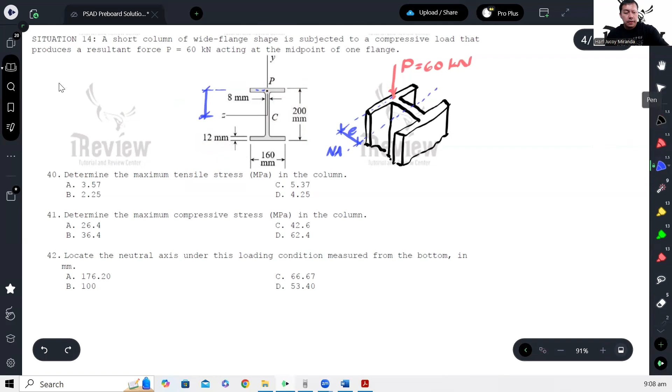The eccentricity E is 200 over 2 minus the thickness of the flange, 12 over 2. That gives us 94. So 94 mm is the eccentricity.

Alright, so this is combined axial and bending. Determine the maximum tensile stress in the column.

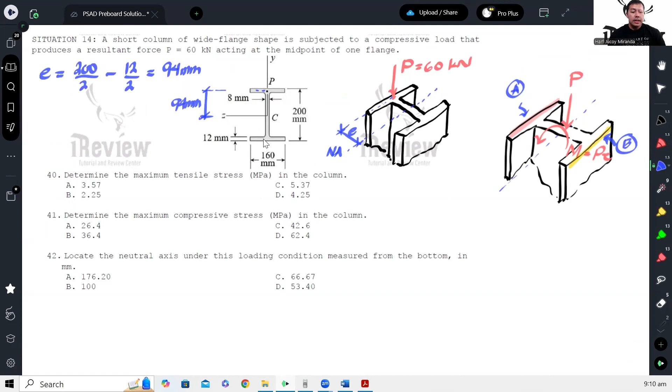Now, for combined stresses in mechanics, our sign convention is positive for tension and negative for compression. But in soil mechanics or geotechnical engineering,

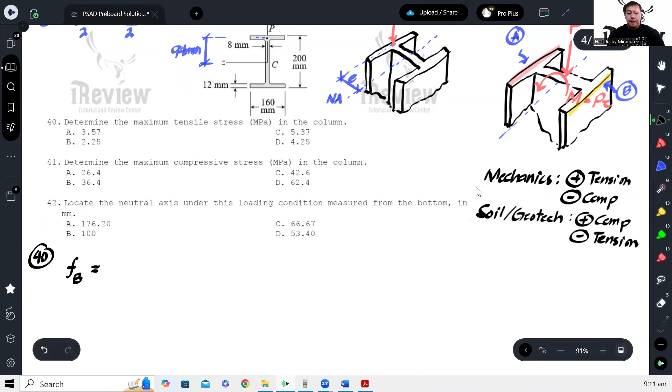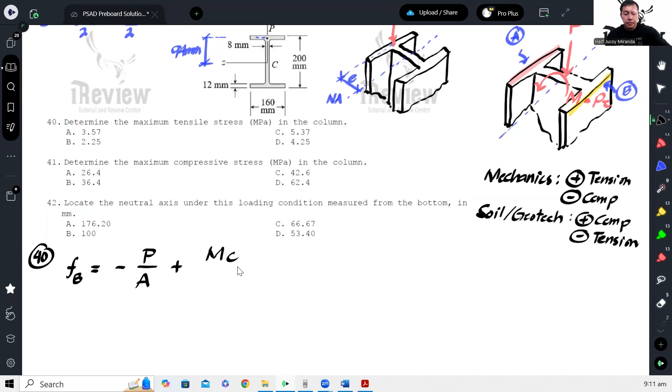it's the opposite: positive is compression, negative is tension, since soil cannot carry tension. So the compressive force will be negative P over the area of the wide flange, and the effect of the moment is positive since it's tension, giving MC over I.

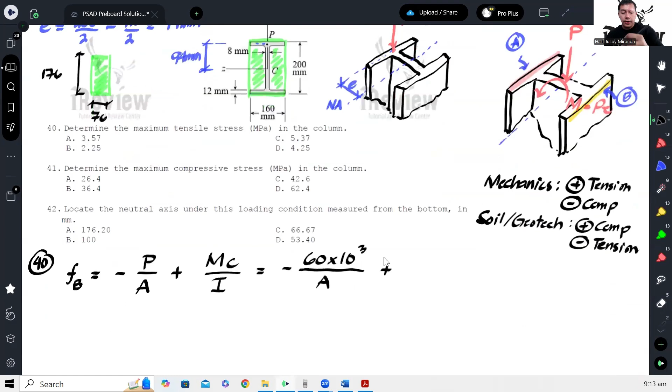That's 0.094 meters, then we multiply by 1 million to convert to Newton-millimeters. Then C is this distance.

Ayun yung C. Kung gaano siya kalayo from the neutral axis, which is half lang ng depth, no? So 100 over I. Sige ko lang muna dito I. Okay? And I think that's it.

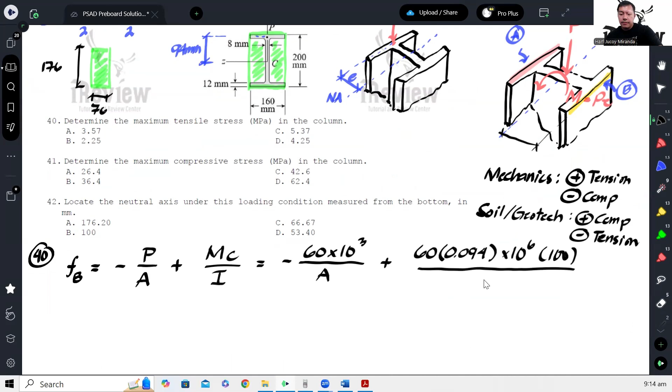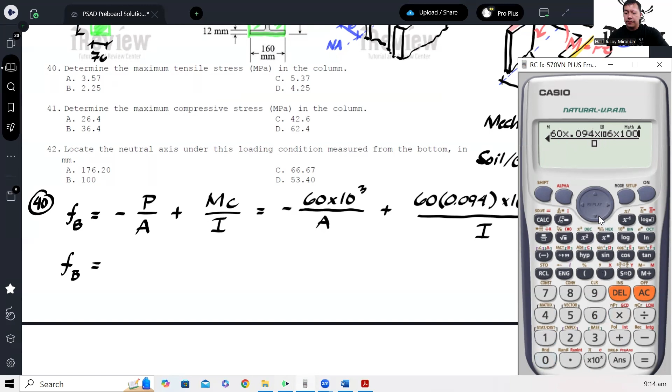We can now calculate the stress at B. Kapag nag-positive ito, ibig sabihin under tension siya. Pero pag nag-negative, ibig sabihin under compression pa din. Okay, so 60,000 over area, lagay ko lang sa A, plus 60 times 0.094 times 10 to the 6 times 100 over I. Lagay ko lang yan sa B, no?

Yung A natin, area, sabi ko nga, 200 by 160, tapos ibawas natin yung dalawang green. So, ang base ng green ay 76, ang height ay 176. Tapos yung I naman is moment of inertia ng buo, which is 160 times 200 cube over 12, minus dalawang moment of inertia nitong green. So, times 76 times 176 cube over 12.

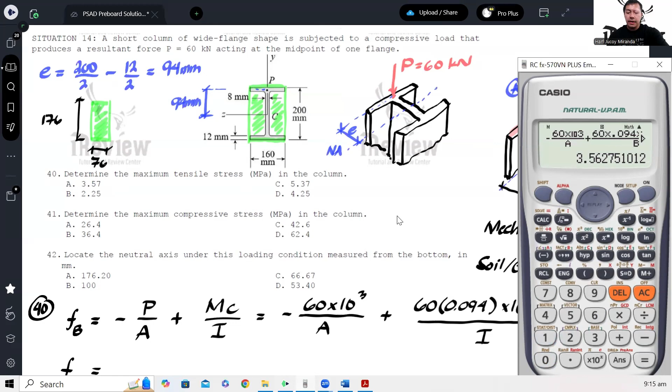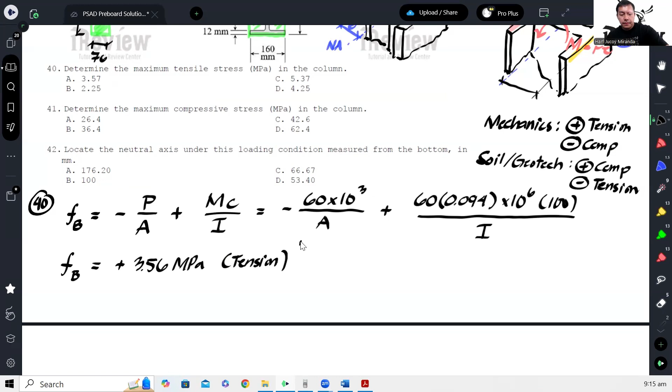Ayan. Okay, and that should give us our stress. At kung mapapansin nyo, nag-positive, no? So meaning this is under tension. Okay, and that will be our answer for number 40.

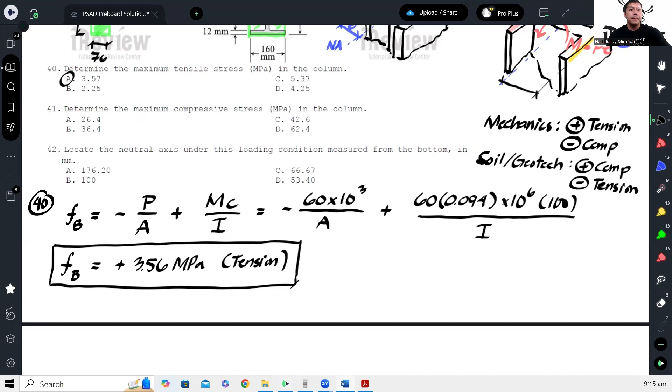Okay? Next, what is the maximum compressive stress? So dito naman, nahanapin natin yun. Dito sa fiber A, no? Kasi nandyan, puro compression. Compression din yung moment dyan. So therefore, number 41, bali, stress sa A will be equal to negative P over A. Tapos ito, negative din.

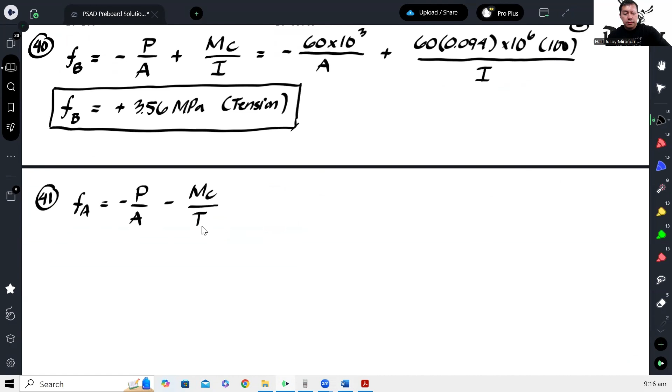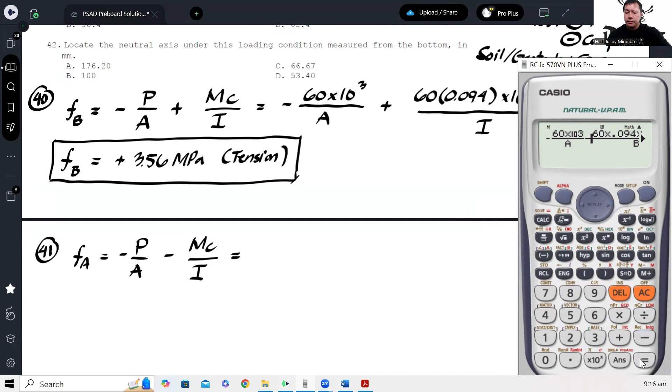So bali, ito lang ulit yun. Gagawin lang natin tong negative, no? So ima-minus lang natin to. Ayan. So, negative 26.43 telling us that this is, in fact, compression. Okay, so that's why it's letter A.

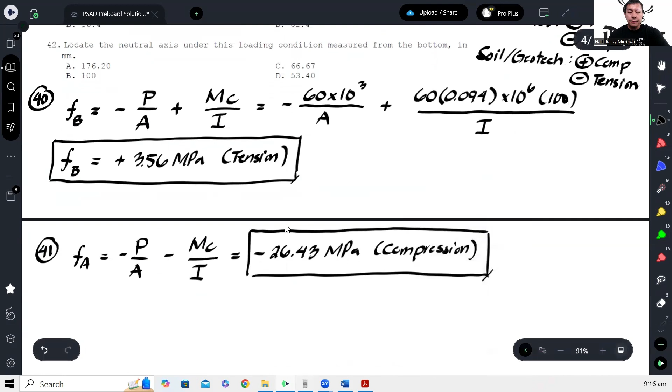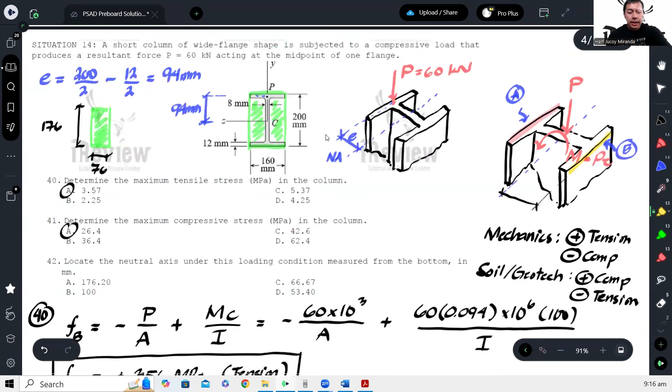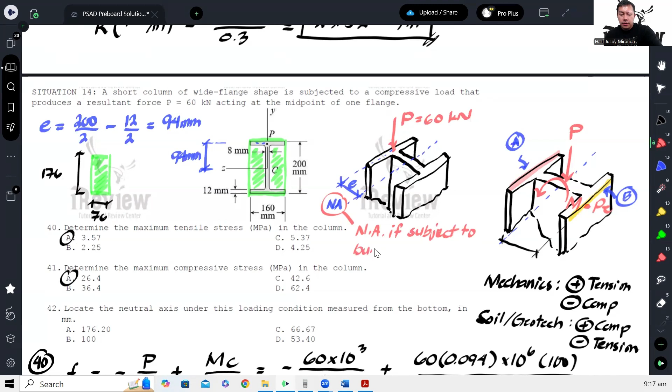Okay, next, number 42. Locate the neutral axis under this loading condition measured from the bottom in millimeters. So, ano ba yung neutral axis? You might be thinking, di ba neutral axis, sabi kanina ni Sir, ito na yun eh. Okay? So, guys, ito yung neutral axis. Neutral axis, if subject to pure bending.

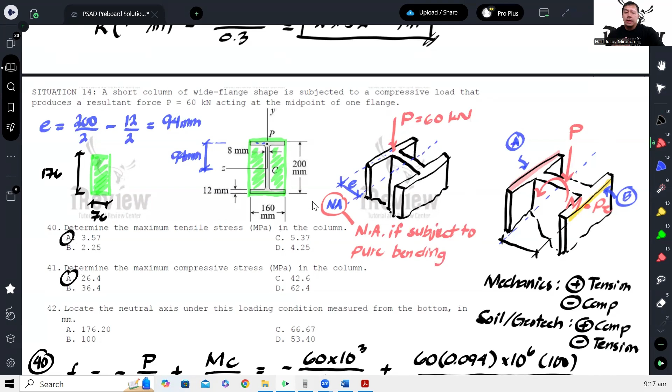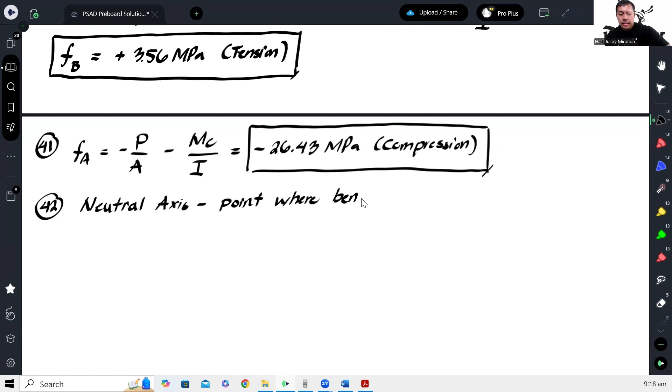Okay? Kaya lang, hindi kasi siya pure bending eh. Combined axial and bending siya. So, kapag sinabi kasi natin na neutral axis, i-define lang muna natin dito sa number 42. Okay? Pag sinabi natin na neutral axis, hindi lang yan basta centroid, no? Ng cross-section. In fact, ang neutral axis, kaya siya tinawag na neutral, ibig sabihin, zero yung stress doon. Okay? Pag sinabing neutral axis, ito yung zero ang bending stress doon sa point na yun, no? Point where bending stress is zero, no? So, ibig sabihin dito, ang mangyayari kasi, kapag titignan natin yung cross-section niya.

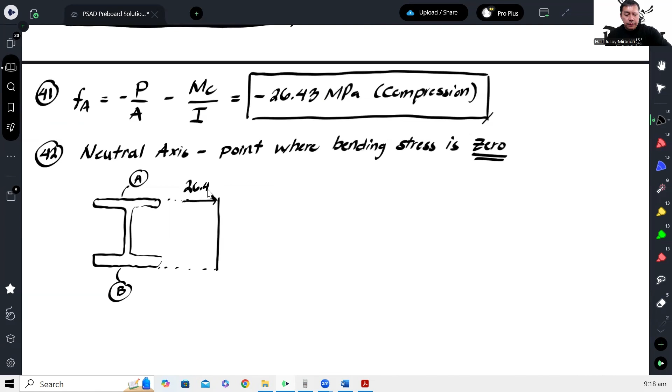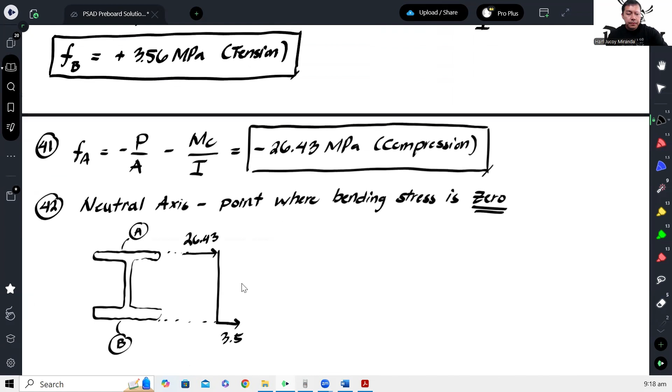Okay, once again, ito yung fiber A, yung sa ibabaw. Ito yung fiber B. Okay, pag dinrawing natin yung stress diagram niya. Okay, so sa fiber A, ang stress doon, compression, ito, no? So, pag ganito siya, compression, 26.43. Okay? Pero yung stress sa B ay tension. So, ito naman yun. 3.56. Ayan, no? So, kapag kinonect natin yan, ito yung magiging itsura ng stress diagram. Under compression ito, tapos ito naman under tension.

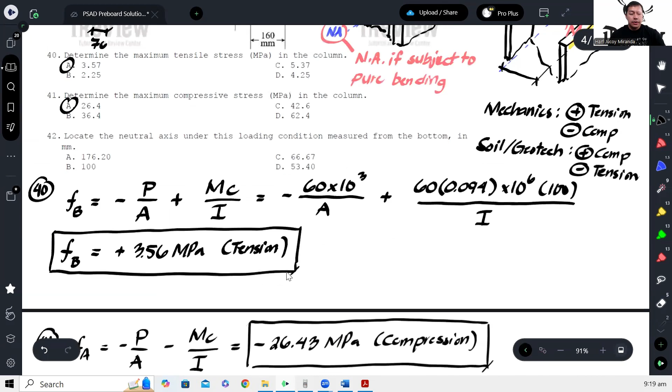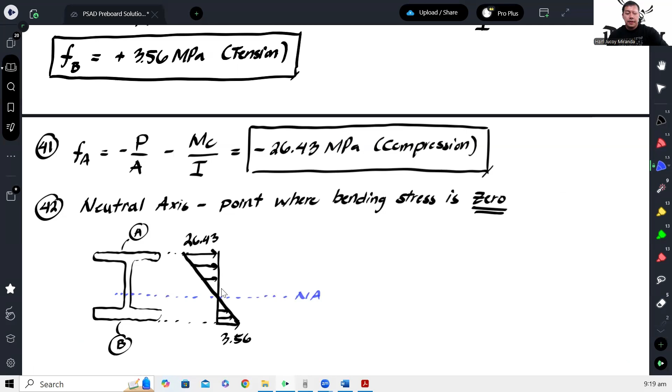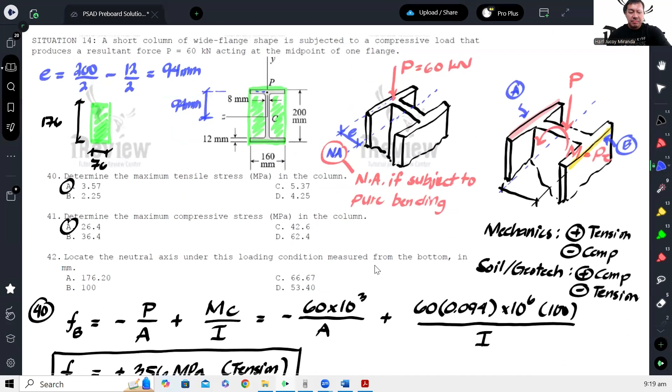Okay, so tinatanong sa atin, ano daw yung location ng neutral axis? Ito yung neutral axis, guys. Okay? So, ano daw yung distance niyan from the bottom? Gaano daw yan kalayo from the bottom? Okay? So, ibig sabihin, nahanap natin ito.

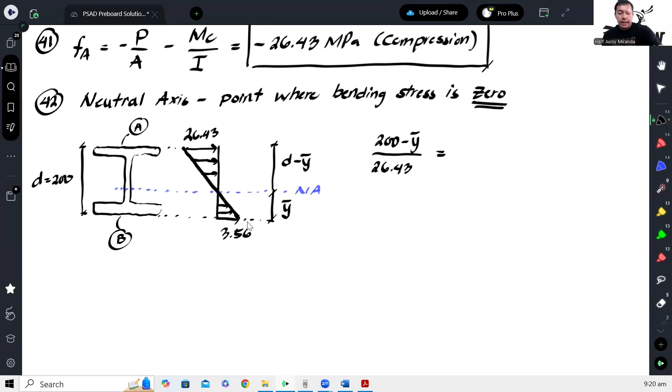Okay? So, para makompute yan, actually, mag-ano lang tayo dito eh. Ratio and proportion. So, di ba kung yan ay y bar, ito ay d minus y bar. Okay? Eh, yung d natin is 200. Okay? So, we will have, yung ibabaw, we have 200 minus y bar over 26.43 equals, ito naman ay y bar over 3.56.

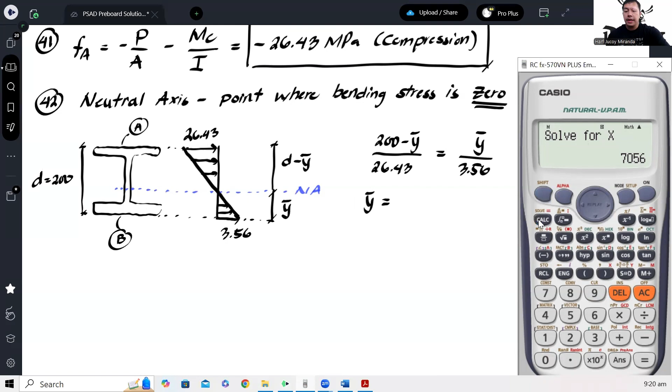Okay, oo nga pala, no? Kapag magre-ratio and proportion ka, hindi nyo na isasama yung ano ha, yung sign, yung negative dito. Hindi na isasama yan. So, kasi naipakita na natin na nasa kabilang side siya, no? Kaya siya negative. So, magiging redundant lang kasi. Okay? So, our y bar is 23.74.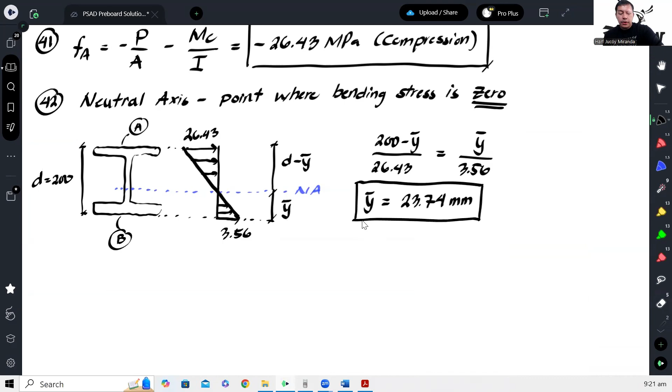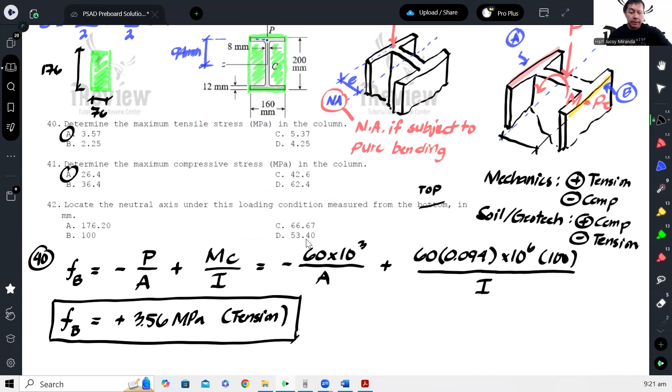Okay? Ito dapat yung sagot, guys. From the bottom eh. No? Kaya lang, I think ang ibig sabihin dito is from the top. Okay? So, I think from the top ang ibig sabihin dito. Okay? So, kapag ginawa natin from the top, edi ano yun? 200 minus answer. Okay? So, 176. So, kaya ito yung sagot. Okay? Typo error. Pero dapat talaga, ang tamang sagot ito. Kaya lang wala sa choices eh.

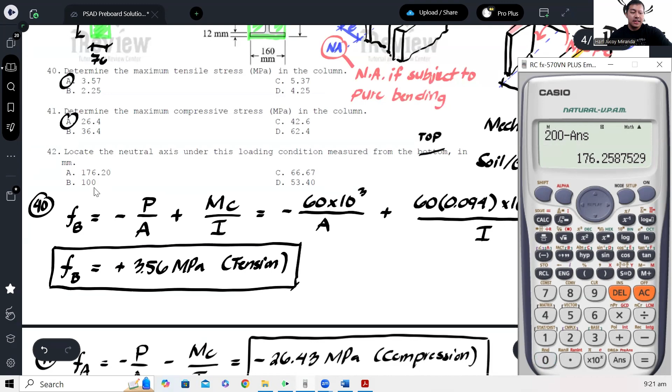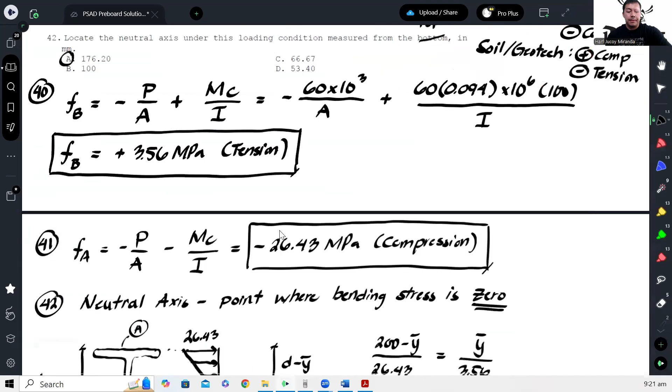Kaya gagawin natin ng paraan kung ano ba yung nasa choices. Nasa choices kasi yung from the top. No? So, yun na lang yung isagot natin. Okay? So that's it for this particular problem.